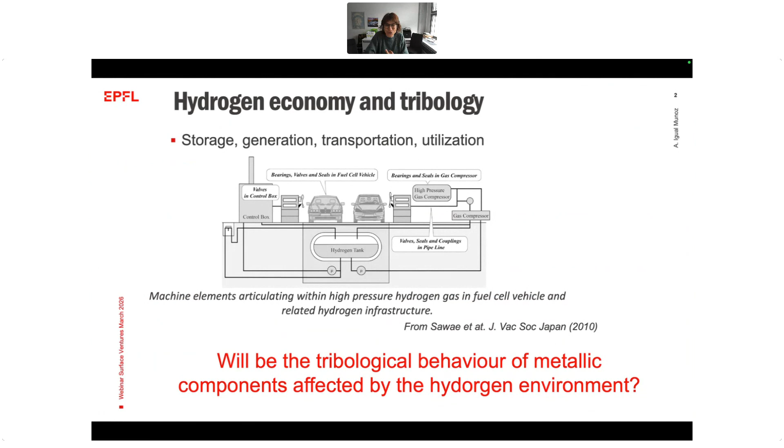Nowadays it's quite popular: hydrogen is expected to be the clean and renewable energy carrier for the future environmentally friendly society. Of course, we have all the machine components or installations that are not used to this hydrogen atmosphere, so how are they going to be behaving, what will their tribological behavior be, how will friction and wear be affected in bearings, in seals, and in all the infrastructure for transportation and generation of hydrogen. This is somehow the motivation of this work that I'm going to present: the tribological behavior of these metallic components that are not used to living together with hydrogen, how they will be affected by this hydrogen environment.

What has been largely studied are the different interactions between these material surfaces and hydrogen. For example, there are quite a lot of references dealing with the mechanism of physisorption of hydrogen molecules, followed by chemisorption of the dissociated hydrogen atoms on metal surfaces, and the possibility of forming metal hydrides. Those are just examples. Also the mechanism of diffusion, where hydrogen is trapped within the materials, and their interactions with the metallurgical structure of those materials.

Then again, I come back to the questions that we want to address: how this tribological contact will influence the interactions, and what will be the response of the materials to these interactions.

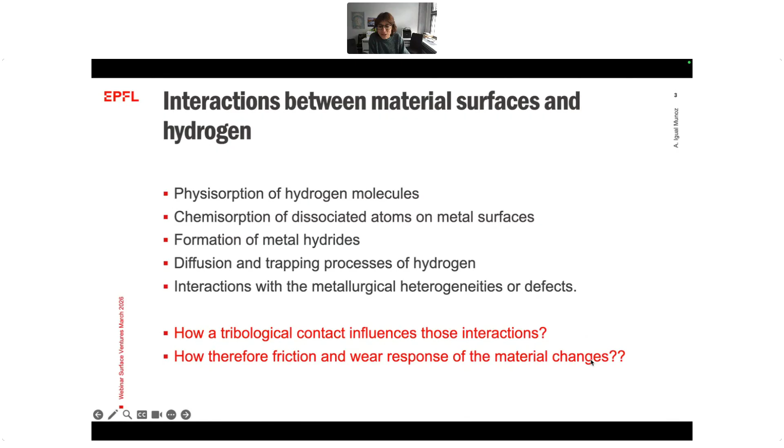At this moment, I checked a little bit before starting what were the main observations of people dealing with tribological contacts within hydrogen atmospheres. I was a little bit surprised because they were a little bit contradictory. In some cases there were observations in which hydrogen had no influence or slightly increased friction. In other cases, hydrogen was capable of increasing or lowering wear, depending on the microstructure and on the charging conditions. People have also tried to determine and quantify the critical amount of hydrogen needed to start really damaging the material.

Recently our colleagues from Luleå were working with rolling sliding contacts using a similar approach to ours. They observed that surface damage follows the concentration of hydrogen diffusing in the material. So the classical hypothesis of dislocation blocking effect of hydrogen cannot explain all the observations.

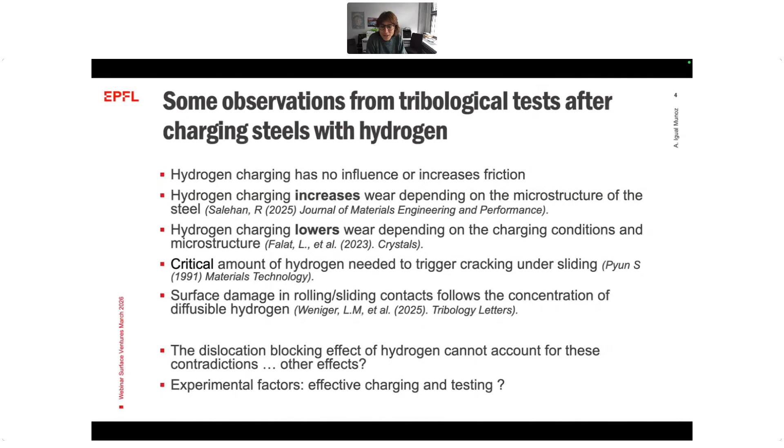Our question is, are experimental factors also playing a role? Because this relates to how we are measuring. So before starting testing, we asked ourselves several questions. First, how do we introduce hydrogen into the material in a well-controlled manner? We can use gaseous or aqueous conditions, and how long it will remain in the material after charging and during the tribological test.

One thing is how to introduce hydrogen into the material in a well-controlled manner, but then we also need to quantify how much has been taken up by the material. And then, of course, how can we discriminate the multifactorial effects in a tribological contact? How can we distinguish the effect of hydrogen from other material or surface effects?

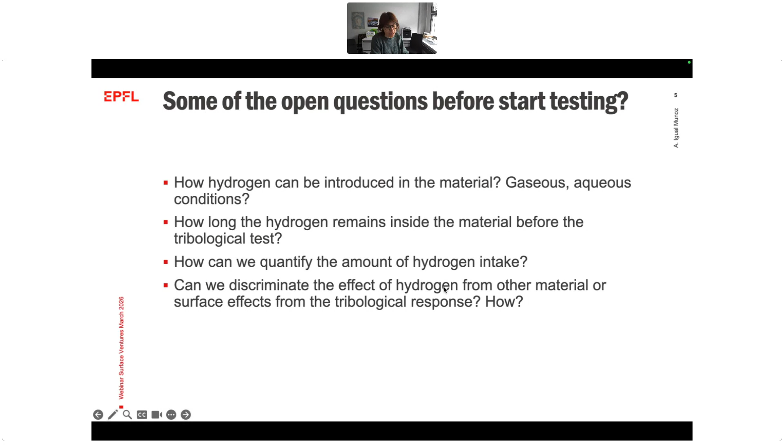So which is the goal of our work, the goal of this presentation? It is to assess the influence of these experimental conditions when we try to understand the effect of hydrogen-metal interactions.

Our strategy: coming from an electrochemical background, we use a simple electrochemical setup to charge the material in a well-controlled manner. Then we try to determine if the effect on the material is real, so we measure changes in fracture energy and hardness, and then we carry out tribological tests under well-controlled surface conditions.

To do that, we do dry sliding, but we also use the triboelectrochemical setup to impose certain surface conditions: passive conditions to mimic typical corrosion conditions, for example for steel, and cathodic conditions to keep the hydrogen inside the material and avoid it escaping during the tribological testing.

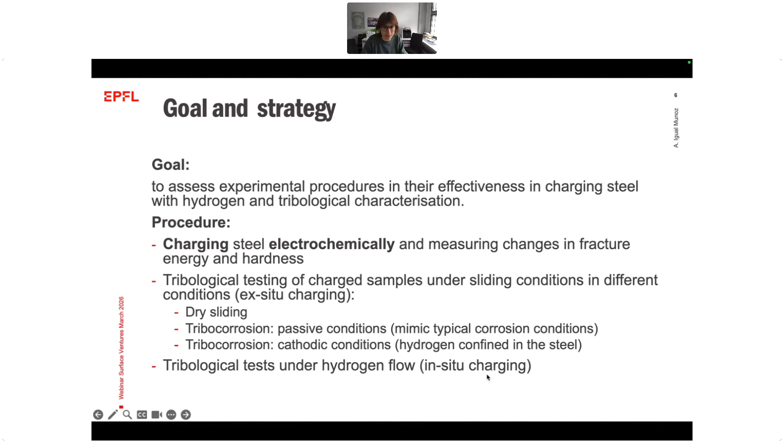One thing is this ex situ charging, but then we went one step further and tried to do the same with in situ charging, which I will explain later, done in collaboration with ERTEC.

Just before starting, a few words about the mechanism through which electrochemical charging of hydrogen into metals takes place. It happens through reduction of a water molecule in neutral or basic medium, or through proton reduction in an acidic medium. By cathodic polarization, we force the reduction of the proton into hydrogen.

This hydrogen is first adsorbed onto the surface. Then this adsorbed hydrogen has two options: either entering into the metal, or meeting another adsorbed atom on the surface and forming a hydrogen bubble. What this adsorbed hydrogen will do depends on several factors: surface factors, electrolyte, and polarization conditions.

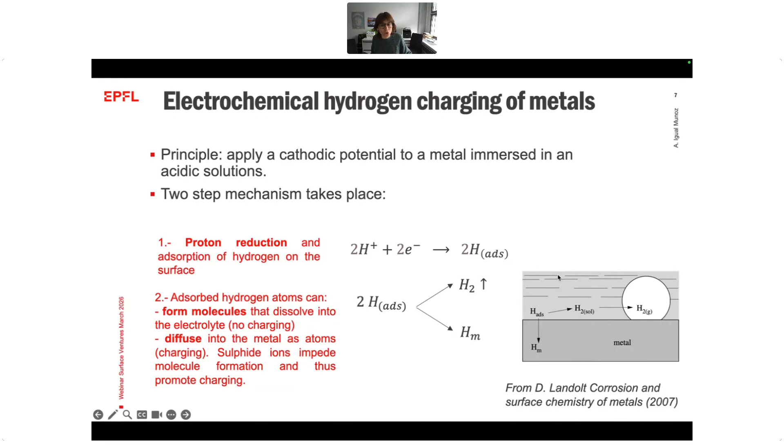What we did is a very simple charging. We used a sodium sulfide solution, because species like sulfides inhibit the recombination of hydrogen. With this solution, we favor hydrogen intake into the material.

We apply a certain current between an inert anode, typically a dimensionally stable anode, which is titanium covered with some coatings, and the cathode, which is the material we want to charge with hydrogen—in this case steel. We apply a certain current for 24 hours.

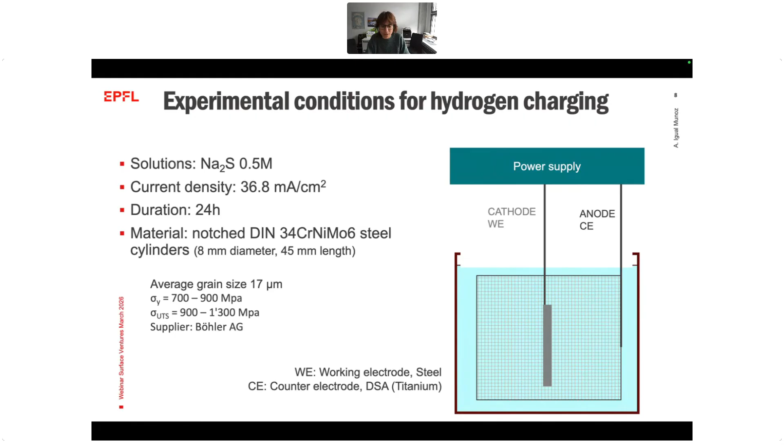In the first case, we charged a Charpy sample to identify the consequences of charging on the properties of the material. The first question, as I was saying, has hydrogen penetrated the steel? If we look at hardness, it didn't change at all before and after charging. However, the amount of absorbed energy of this steel during fracture decreased around 50% after 24 hours of charging.

Even more, this effect of hydrogen remained the same over several hours. We can see the fracture energy after charging for 24 hours and leaving it in open air for 3 hours—the decrease in fracture energy didn't change during this period. That was good news, because it gives us a little time to carry out the tribological test while the effect of hydrogen is still there.

On the other hand, the difference between the charging effect when we charge 24 hours or 48 hours was not really anything—it was exactly the same.

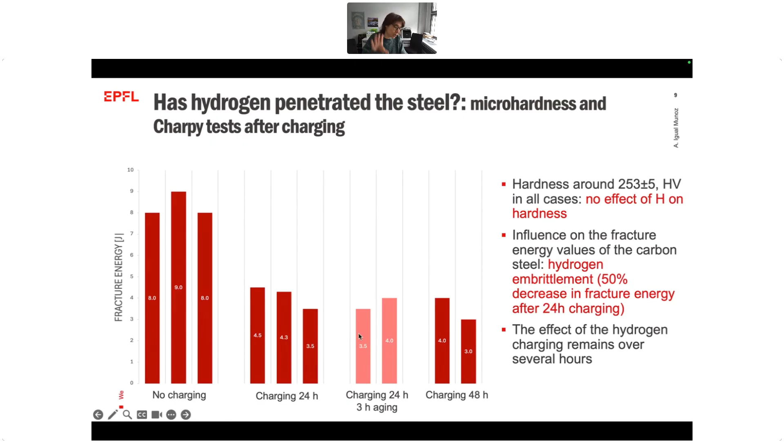So with this test, we already know we have the hydrogen intake, so we can define some tribological testing conditions. We did it in a tailor-made tribometer, a homemade ball-on-disc tribometer, under different environmental conditions.

So we repeat the same exercise, charging the steel for 24 hours. We are going to rub against an alumina ball, 6 millimeter diameter, to impose a certain contact pressure with a sliding velocity of 20 millimeters per second, stroke length 4 millimeters, for a certain number of cycles.

And then what we change are the surface conditions. We did tests dry, but we also did tribocorrosion tests under well-imposed potential electrochemical conditions, meaning cathodic potential. This implies that the hydrogen remains within the material. Then, in presence of surface film, we do that by applying an anodic or passive potential.

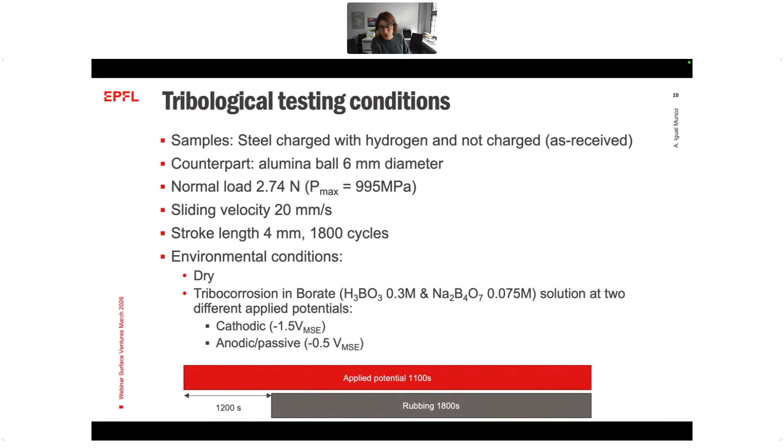So this is the experimental sequence we did, and this is the experimental setup. Basically, we have a linear motor that moves back and forth and transmits a weight that transmits the load into the sample. We measure the normal load and the frictional load through a 3-axial force transducer.

All of this is inside an electrochemical setup with a reference electrode that allows us to impose this surface condition, the potential, and a counter electrode that allows for measuring the current, which is directly proportional to the reaction rate. Then we impose these conditions and we rub, as I said, through this moving arm up and down.

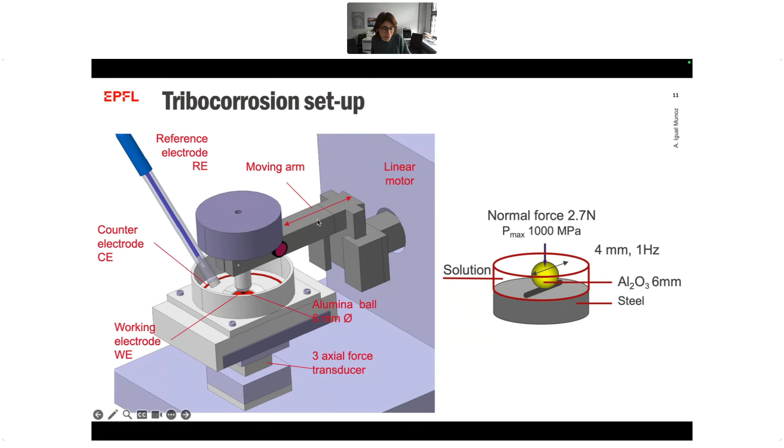What are the results? What do we measure? First of all, under cathodic potentials, as I said, here the hydrogen remains inside.

So at the beginning, when we impose the electrochemical conditions, we just measure the current in the sample, it's negative, because we are again reducing the water.

And when we start rubbing, the current went down a little bit. This small variation in the current can be attributed to the increase in the mass transport of oxygen towards the surface, also because of the pin motion, also because of the roughening of the surface. But we have this decrease.

In the non-charged sample, we see slightly different behavior of the current, of course, because we are somehow reducing the water on the surface, and we didn't observe any major difference in the coefficient of friction.

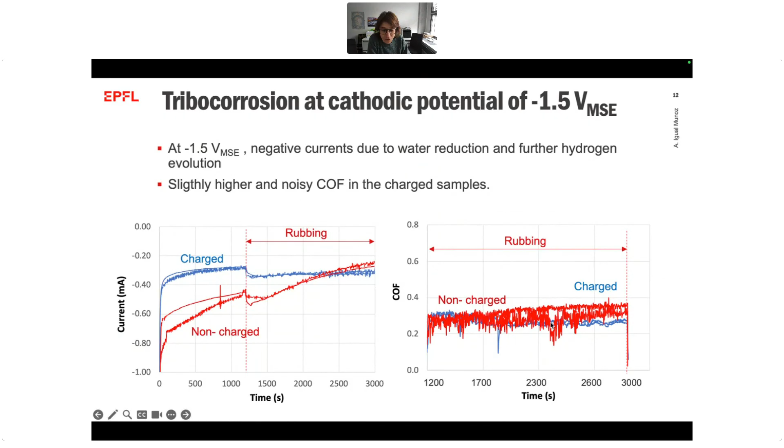Then we go to see what happens on the surface, and this is the optical image of the non-charged and charged samples. We see in the non-charged sample this kind of nice plastic deformation with smearing and a uniform wear track. The width of the wear track is more or less the same, but in the charged sample, it seems that we are blocking the plastic deformation, generating more disrupted surfaces.

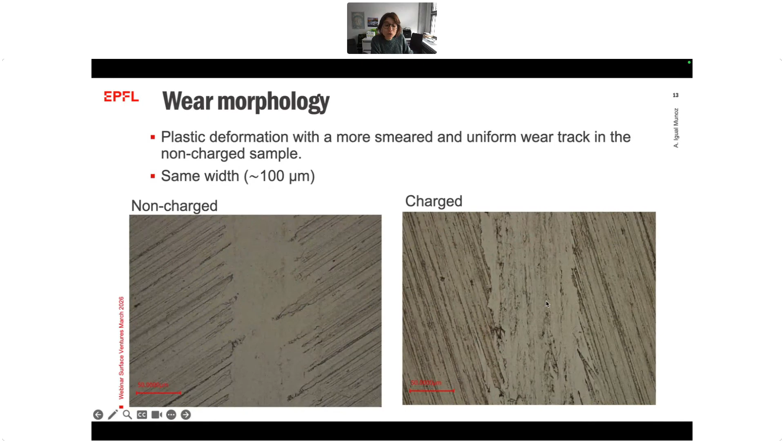So we already see differences. We went a little bit further in the analysis. Now we cut a cross section, perpendicular to the sliding direction. So this is the wear track. We do a FIB cross section, and then we can see not only the surface but also the subsurface, what happened inside the material.

And what we observe is this kind of formation of blisters in the non-charged sample, with even local delamination of this very smeared material.

And in the charged sample, the hydrogen uptake somehow blocks the deformation, and then what it generates is more accumulation of strain, so a little bit of embrittlement of the material, and grain refinement—slightly higher grain refinement compared to the non-charged sample.

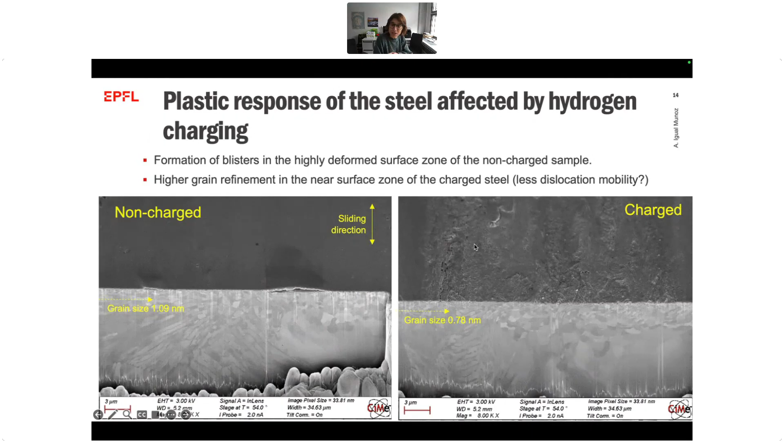So we see differences even if we have the same shear. Then we go to the other situation.

Now we apply a passive film. So we form, in a well-controlled way, a surface film on top of it. And here the protocol is always the same: we impose the electrochemical conditions and we register the current.

So we already see, from the non-charged red curve with respect to the blue, a difference from the beginning. The non-charged sample shows a very low current at the beginning. Of course, at the onset of rubbing, the current increases because we are mechanically detaching this oxide layer and accelerating the corrosion of the underlying metal.

So current increases. In the charged sample, in this case, when imposing the electrochemical conditions, we have an abrupt, huge increase in current, and then an exponential recovery. This typically means we are oxidizing something. What we are oxidizing, we will see in a moment.

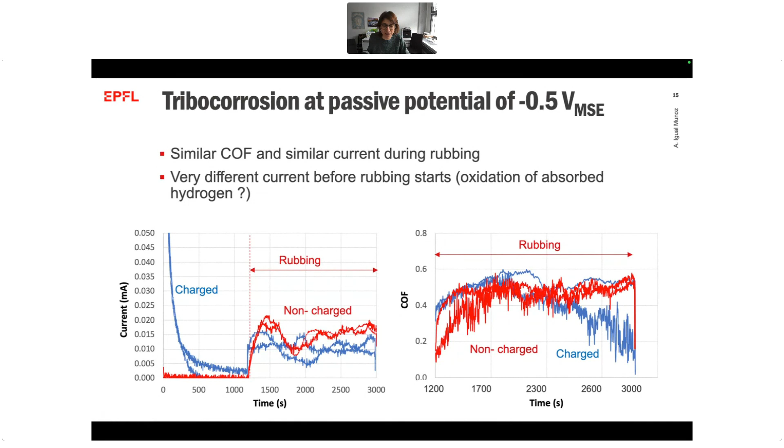The coefficient of friction, more or less, is very similar in both cases. We do the same and have a look at the surfaces. In both cases they are also very similar: the wear morphology, plastic deformation, presence of third body, and the same width of the wear track.

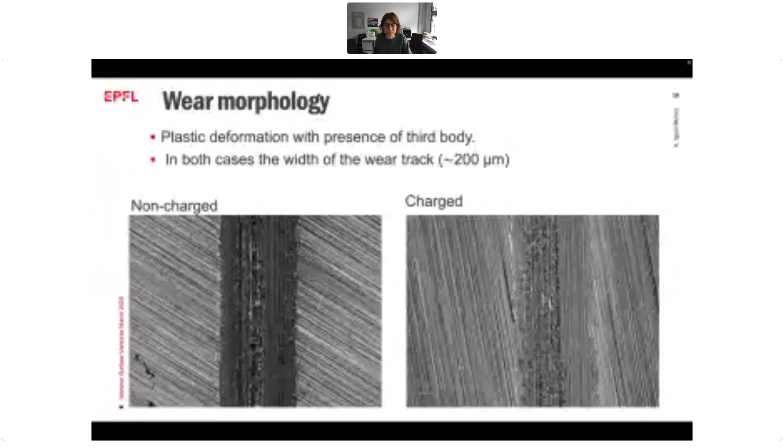If we again do the cross section, this is the sliding direction. Here also at the subsurface level, we see more or less the same features. We see this third body, we see this smear material, we see cracks — subsurface cracks, surface cracks. So basically we see more or less the same effect, same grain sizes.

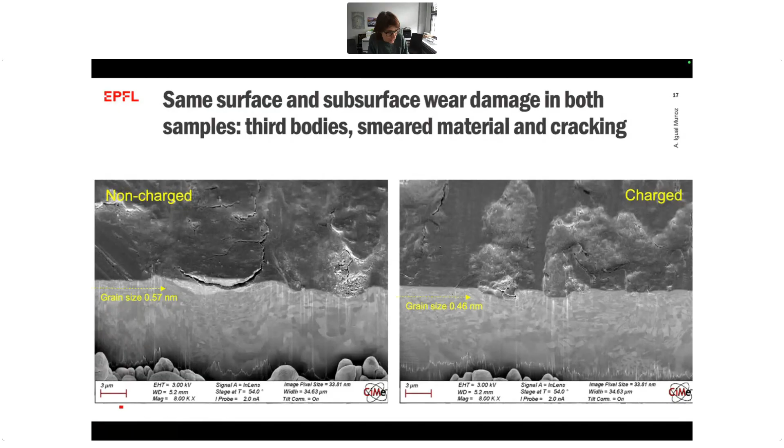So what has happened? Our question is: are we sure we have inside the hydrogen we have taken during the charging? To verify that, we did an extra test.

Imposing, when passivating the steel, we have to apply an anodic potential, a certain potential, and what happens is we register the current at this potential. Here there is no rubbing. In the non-charged and the charged sample, we see a difference in current, meaning a difference in charge during this period. What happens is all the hydrogen we have at the surface and inside the material, because of the oxidizing conditions, is being oxidized and is leaving the metal.

So at the end, the response of the material charged and dissolved in hydrogen is the same as the one that is only passive. So the difference in current corresponds to the oxidized hydrogen between the non-charged and charged samples. And then we can easily calculate the amount of hydrogen that corresponds, assuming a certain diffusion coefficient, to the maximum amount of hydrogen we can put inside the material.

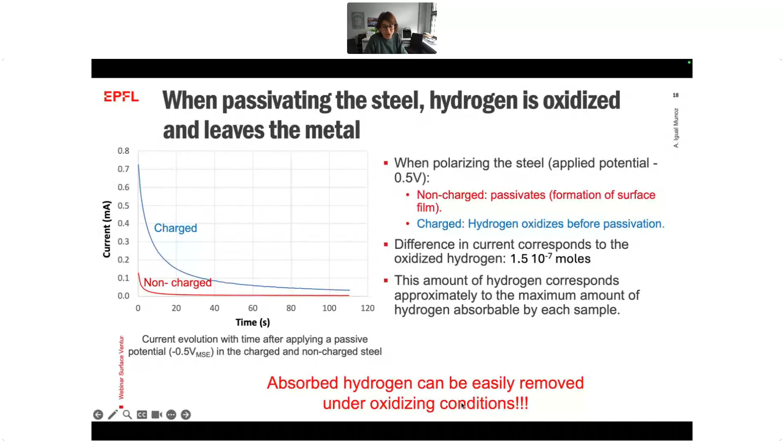So the absorbed hydrogen can be easily removed under oxidizing conditions. That means the embrittlement we observed during passive conditions was not due to the effect of the hydrogen, but mainly to the fact that you have a surface film, a passive film, on top of that. This is already known in tribocorrosion — it's called the Roscoe effect.

So the main effect of this passive film is that it generates and blocks the dislocations. So we start accumulating a lot of strain. We cannot eliminate the dislocations because we have this passive film, so the effect is an embrittlement effect. Whenever we don't have surface films, the dislocations can be annihilated at the surface, and the strain accumulation is a little bit limited. So this is the explanation why we have the same response in the case of charged and non-charged samples.

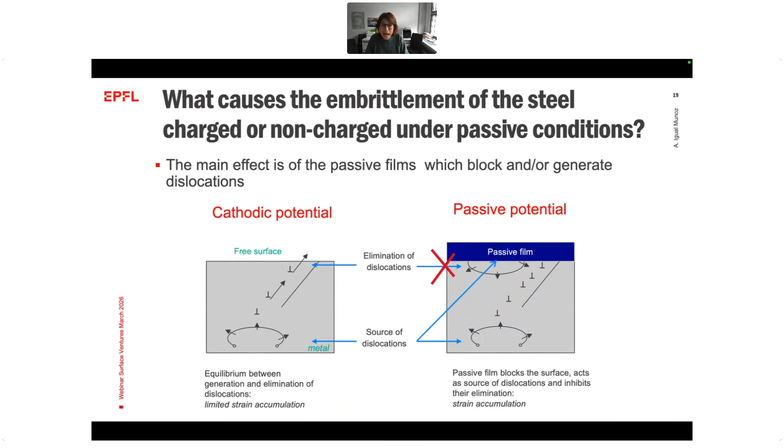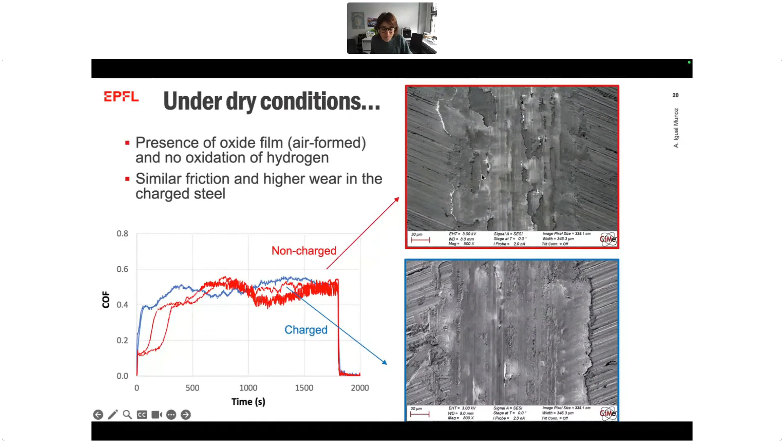On the subsurface, the differences are even more clear. In both cases the mechanisms are more or less the same. We have the third body here in the non-charged, and we have the third body in the charged. We also have the subsurface deformation, the tribologically transformed part of the subsurface — here it's a little bit thicker.

But in the charged sample we have a thicker third body, a cracked surface, and a higher degree of recrystallization. The grain sizes are slightly smaller, so there are differences. In this case we are not removing the hydrogen by electrochemical imposition of oxidizing conditions, so it's still there. What happens when we charge and load mechanically is another question.

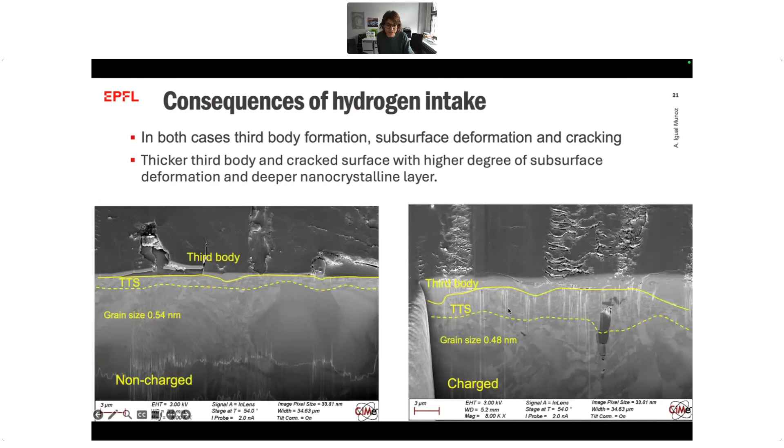As a summary, we have quantified the grain size of the material as a function of depth, how deep we measure this grain size, with 0 being the surface. We see that the main differences occur under cathodic conditions, whenever we keep the hydrogen inside the material. So the charged sample, whenever we have this hydrogen, shows decreased grain size over all the studied subsurface depth.

In the case of passive, charged or not charged, there is no difference. And in dry conditions, we still see, at the very surface, a small difference.

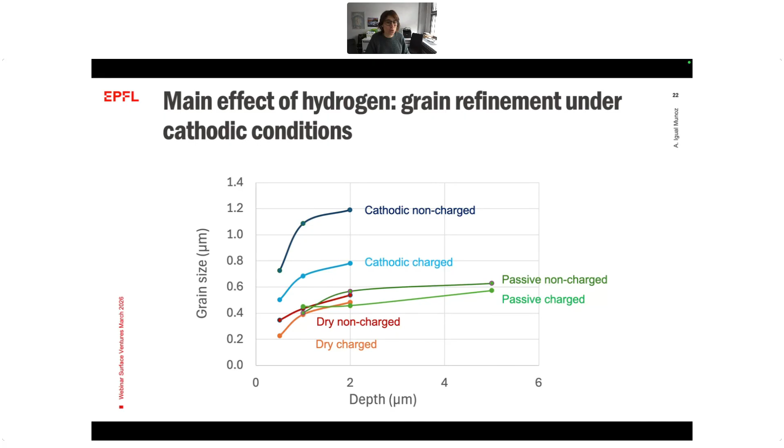Finally, these observations demonstrate that the hydrogen effect is strongly dependent on the electrochemical conditions, in the presence or absence of surface films, even though we may have the same wear mechanism.

When we don't have these surface films, working under cathodic conditions, hydrogen is confined in the material, and we see a difference in the plastic response of the steel. Under passive conditions, we don't see it; other effects play a role. Under dry conditions, there's a combination of surface films and the presence of hydrogen. All these effects can still be explained by this dislocation blocking effect of hydrogen, but we must take care about the presence of these surface films.

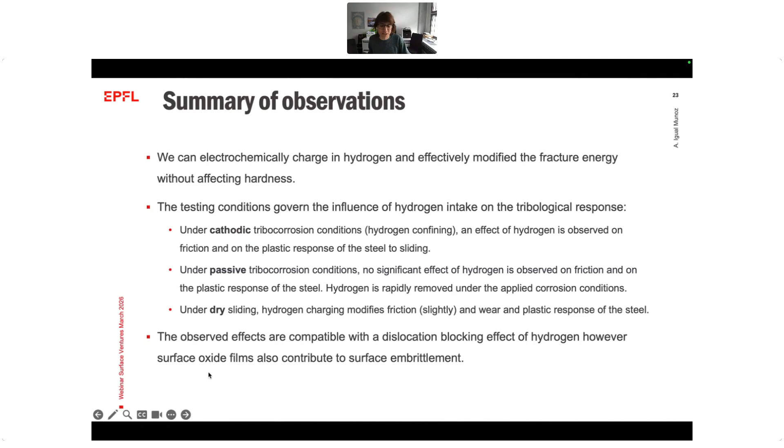So now we do the second iteration, the reflection from this work. We say, whenever we design an experiment to assess the influence of hydrogen atmosphere in my material, in my machine component, we have to ensure effective charging. We have to ensure that hydrogen is not lost during the experiment, and we have to be sure which other factors that cause embrittlement are considered.

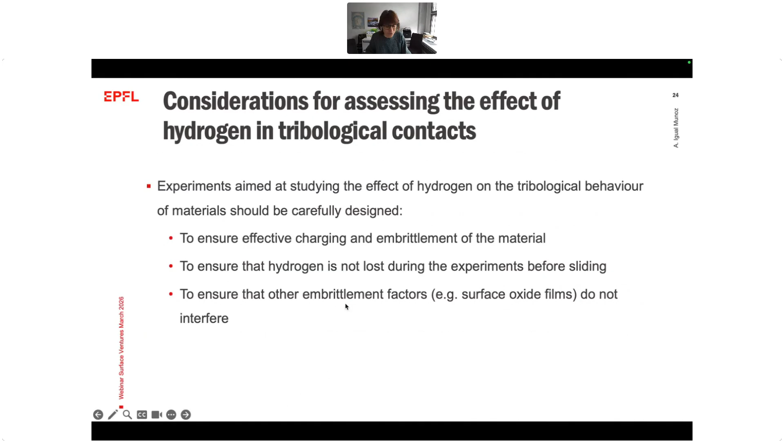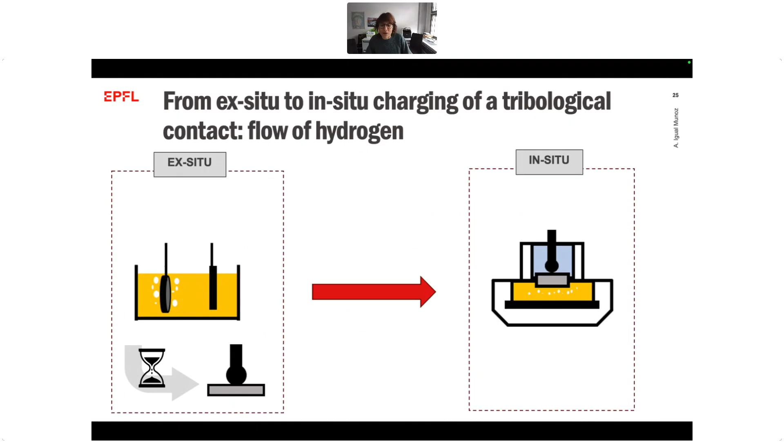So for that, we went from an ex situ experiment, where we charge and then do the tribological test, to an in situ conception of the testing conditions. We developed, together with ERTEC, an electrochemical permeation cell, based on the classical permeation technique introduced by Devanathan and Stachurski.

This is known in electrochemistry, where we have a thin membrane, in this case our steel sample of 3.5 millimeters in diameter, and we charge under the same conditions we observed in the previous example. We charge the steel in the entry chamber, and it diffuses through the sample, where on the exit chamber it can be quantified or oxidized. In the generation chamber, we reduce the proton; in the exit chamber, we oxidize the hydrogen, so we quantify the hydrogen flow.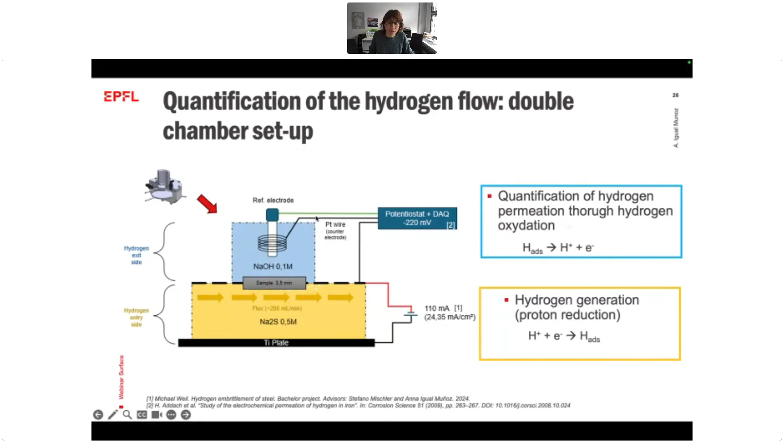So this is typically an example of how we quantify this flow. We impose certain conditions in the exit chamber and register the current. At the beginning we passivate, and then we start charging the bottom part. Just from the current, and using Fick's law, we can extract directly the diffusion coefficient of hydrogen in my specific steel. This current is directly proportional to the hydrogen flow I'm going to have in my system.

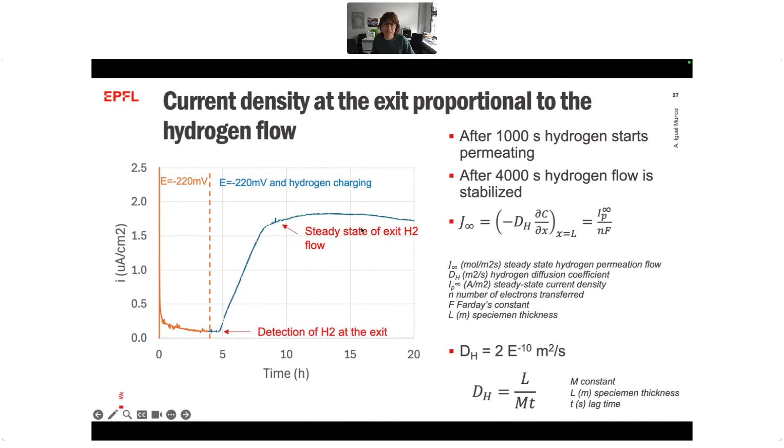This system can be a little bit more elaborated to determine exactly how much hydrogen is trapped in the steel, because then we do just a mass balance. I know the amount of energy, the amount of current I use to reduce the proton. This proton will partly enter the steel, and part will be recombined, forming hydrogen. If I have a hydrogen sensor in the solution, and I know the amount of hydrogen that has been recombined, I can determine how much has gone through. In the exit part, I determine this diffused hydrogen. The difference is what remains in the steel. This is another way to determine the amount of trapped hydrogen in the steel.

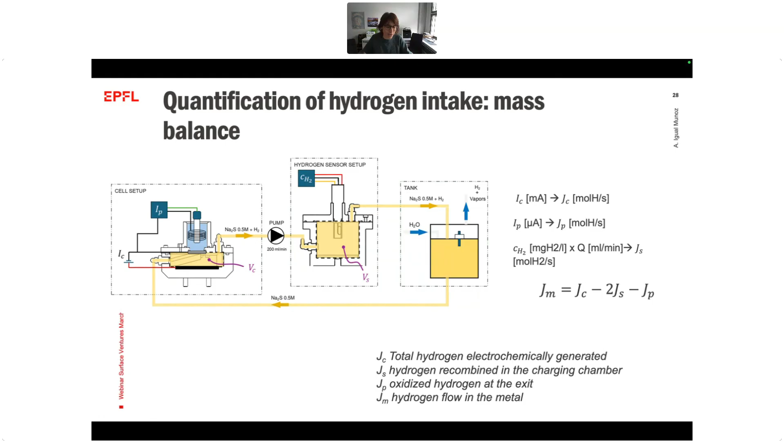So this is with respect to the generation of the hydrogen flow, and then the quantification of this flow.

But then we can take the permeation cell and place it inside a tribometer, and this is what we did with Rtec. We can put our permeation cell here, and look at the current, which is proportional to the hydrogen load. We apply the load, and because of the stress distribution within the material, we change the flow rate of hydrogen through the steel. This is just with static loading, without sliding. The static loading, the generation of this stress field, influences the flow of hydrogen at the exit.

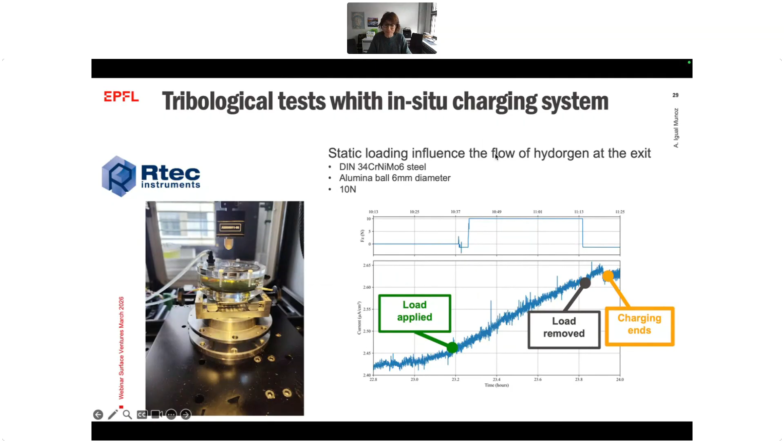And now we slide. We can slide against an alumina ball, under the same conditions as the ex-situ experiments, the same sliding velocity, the same normal force. What we see, comparing the coefficient of friction, is that we start seeing some differences between the tribological response in the ex-situ cell compared to the coefficient of friction in the in-situ cell. This is under dry conditions.

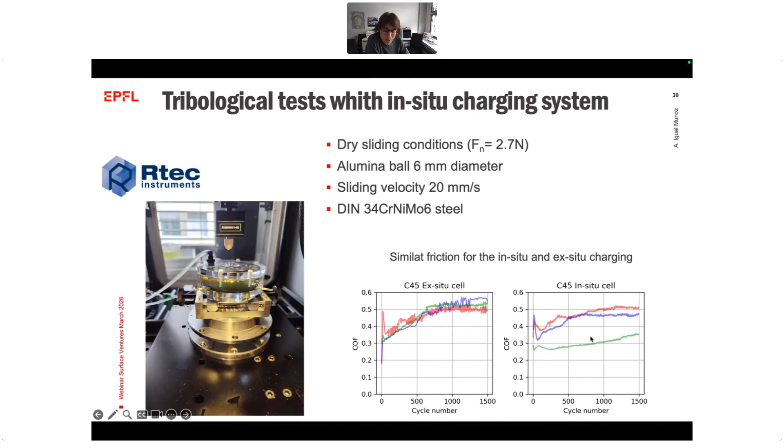Have certain scattered and slightly different coefficient of friction. What we observe when we look at the surface is the non-charged wear track, the wear track of the charged sample ex situ, and the wear track of the charge in situ. We see different wear depending on these charging conditions. In this case, we have thicker and higher cracked surface in the charging condition.

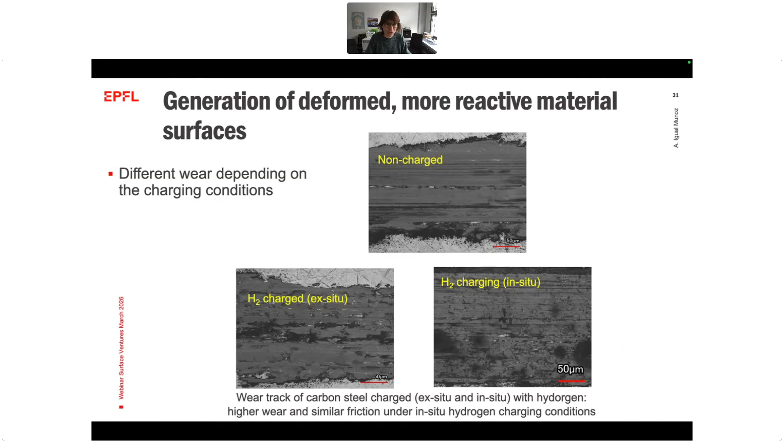This is an ongoing work, of course. We are now trying to understand this interaction, hydrogen and material, but still developing the smarter way of carrying out this test to answer the question of the interaction hydrogen-metal under tribological conditions.

So with all of this, I would like to conclude this webinar by saying that if we want to understand the interaction of materials and hydrogen under tribological conditions, we have to think very carefully how we want to carry out the experiments, and take care of the already developed concepts in tribology and then in tribocorrosion, because here we are in a reactive environment. Hydrogen is a reactive environment, so we have to think twice, and for that we have concepts. There are different things.

One thing is that we operate on the continuous flow of hydrogen - this is the in situ measurements. Another thing is that we just charge and then we test. The questions to be answered will be different, and this will also depend on how we test the operating conditions of the machine component we are addressing.

So in any case, the hydrogen flow effect can be assessed with these tailored experiments and specific permeation cell coupled to a tribometer. And then, of course, we can start answering the real questions about the effect of stress-induced deformation on hydrogen intake and uptake. This again requires being aware that during testing we generate, depending on the testing condition, a certain surface with certain properties that can modify the outcome of the hydrogen-metal interactions.

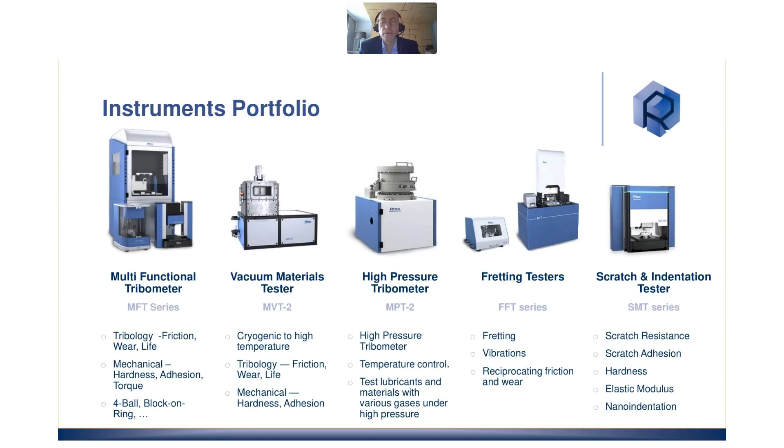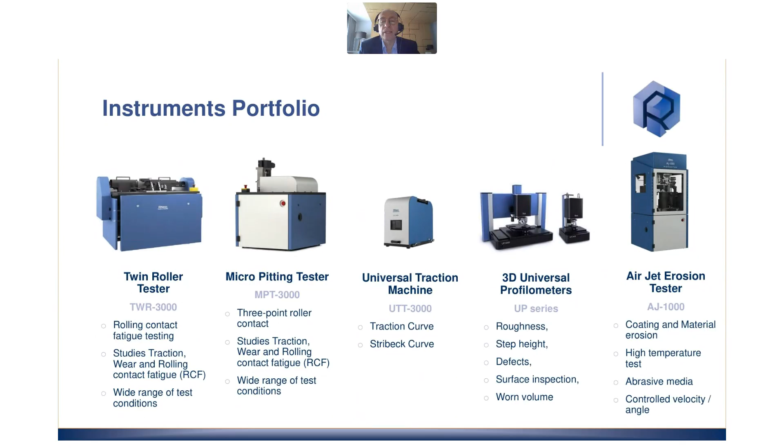There is a presentation I don't have here, because Rtec Instruments has been involved quite a lot in micro-mechanical testing with scratch and indentation at room temperature. There has been a strategic partnership and new information about the collaboration between Rtec Instruments and Micro Materials. There's a new press release from last Monday that I invite everyone to look for, about the extension of measurement capability for nano and micro indentation at high temperature, which gives more insight into the range of application for mechanical characterization.

To continue with today's application, in recent years there has been a lot of requests about electrified tribology, being able for a fluid or grease to characterize the combination of lubricant characterization with electrification. This has been requested quite a lot for tribology testing, whether with a 4-ball test, linear oscillation, mini traction, fretting test, or high frequency oscillation. There has been quite a large demand for electrification.

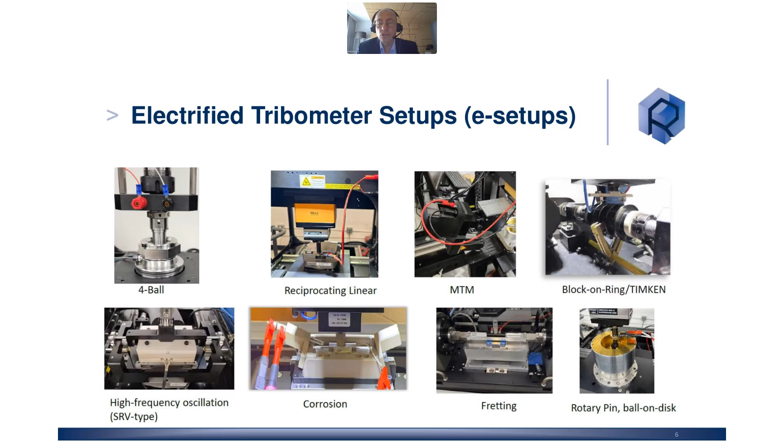The interest behind that is there's a lot of need in the industry for testing in tribology with electrification. This comes from electric vehicles and hybrid vehicles, where you want to test a gearbox or e-motor, where there might be stray current remaining that influences the wear resistance capability of different materials. The combination of lubricant with material in presence of stray current might influence the wear resistance of the material.

Therefore, having options like electrical contact resistance combined with the possibility of tribology testing with load and speed gives good insight for laboratory testing in different conditions. This could be electrical contact resistance measurements, or a potentiostat applied with DC and AC current, but there are a lot of different applications and conditions related to that.

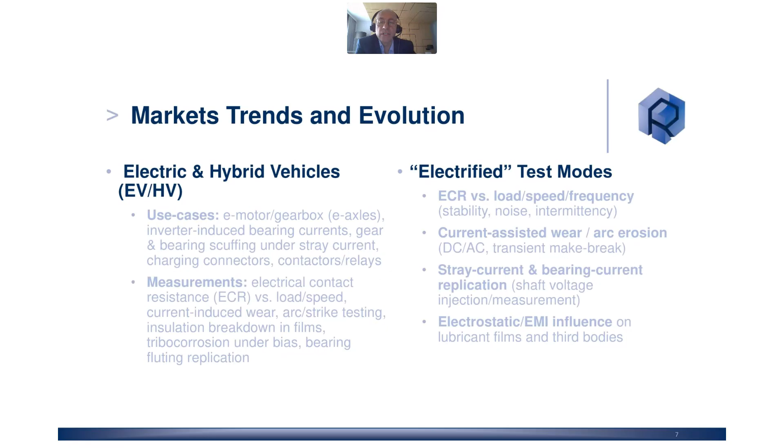The collaboration done with EPFL has the advantage of being able to propose hydrogen cells that I will show you later. The big advantage is that it has also been possible to develop a tribocorrosion cell of a new generation based on these hydrogen cells, which gave a better understanding of the best conditions of testing for that.

The tribocorrosion cell, if you're not familiar, has the possibility with a 3-electrode system to have the sample as a working electrode, then a reference electrode and a counter electrode, generally platinum, in order to have a 3-electrode system being able to apply a potential and then measure the current.

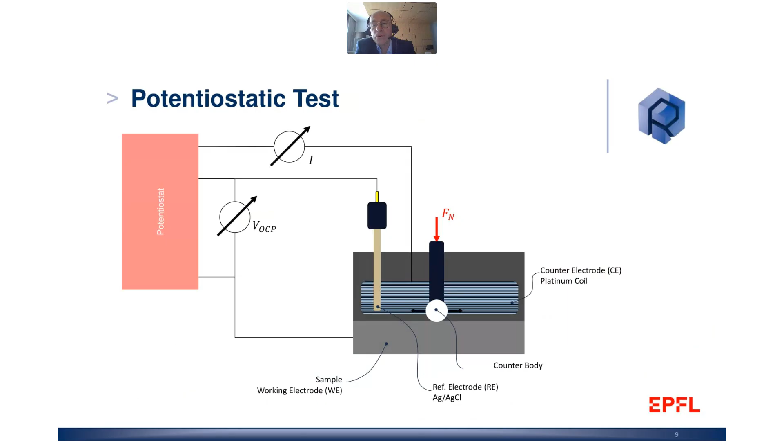That represents a very nice application where you could simply apply a potential. You can initially measure the open circuit potential, seeing the current under open circuit potential condition. But by applying a potential, you can create passivation or depassivation of the material and simply see the evolution of the current before starting a tribological test.

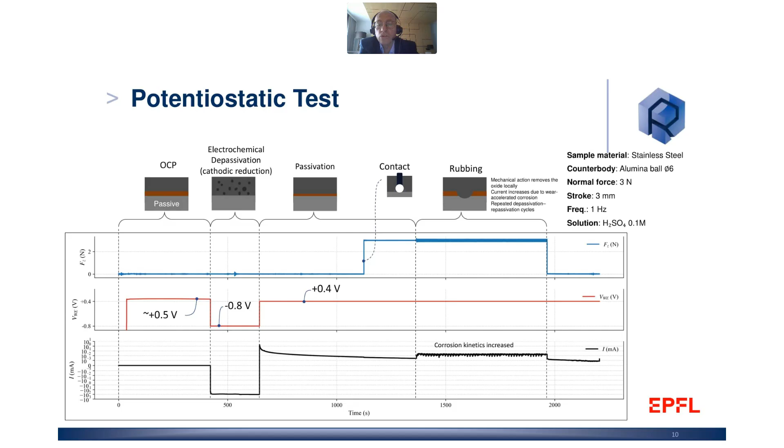After you start a tribological test, you are able to measure the corrosion kinetics, getting useful information on wear and coefficient of friction of the material under applied potential, as well as measuring a current of the corrosion kinetics with this kind of setup. That's a setup possible on a linear tribometer and a nice add-on for different tribocorrosion studies for materials. But what is even more of an advantage is this combination for hydrogen tribology.

There have been a lot of requests for testing in the recent years. For many years, people have been interested in doing tribology under hydrogen environment and hydrogen conditions, and there have been a lot of requests for high pressure tribometers. But high pressure requires a certain condition of testing with a specific chamber. The interest for hydrogen tribology has gone up to high pressures of 100 bar.

Of course, high pressure hydrogen requires very strict conditions of safety and regulation, meaning that for a lot of cases, the budget of the equipment is much lower than the budget required to build a specific laboratory. So the hydrogen tribometer is equipment that would not be possible in all kinds of laboratories, because it requires a specific laboratory to be able to accept it. The idea behind the development at EPFL is really to have the possibility of doing testing with hydrogen charging of material.

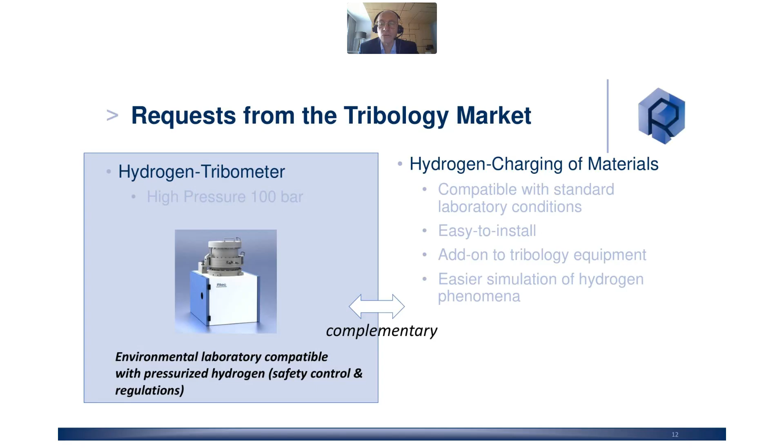Of course, these two ideas are complementary. It does not mean we'll replace the whole hydrogen tribometer, but it has a big advantage to be able to do testing under hydrogen in a standard laboratory without strong safety regulation.

For those of you not familiar with electrochemistry, the idea is relatively simple: if you apply a potential under a liquid environment, you are able to generate hydrogen. This simple idea in electrochemistry was taken as an advantage in the EPFL setup, in order to generate hydrogen simply by applying a potential in a specific liquid solution, and be able to simulate hydrogen embrittlement in steel material as an example.

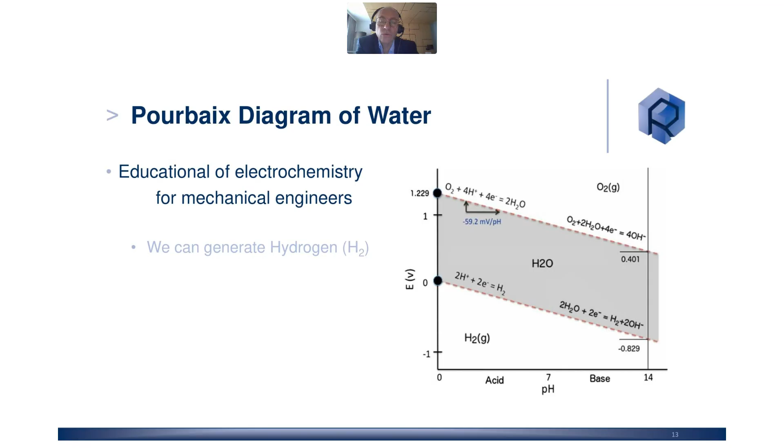Of course, there are many technical details on this hydrogen testing, but in reality it is a relatively easy add-on to an existing linear tribometer in order to do study under hydrogen embrittlement, hydrogen environment.

The idea behind this kind of hydrogen study is that you still have the application where you can charge the material under hydrogen at high pressure, then try to do in situ measurements under high pressure. But here the idea is really to have a setup of electrochemical charging and be able at the same time, or just after, to do tribological tests. This cell is relatively small in size and has the advantage of being able to be installed on a standard tribometer to do already advanced studies.

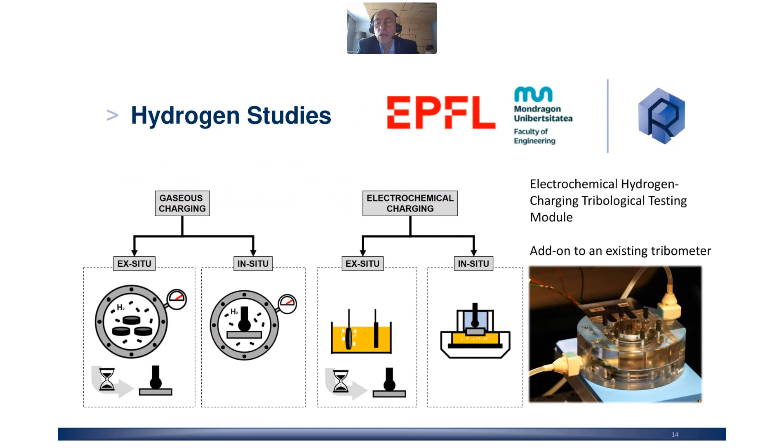So I'll show you a bit the application of hydrogen on an existing tribometer. I did not give you all the detail in reality, but we would be happy, with EPFL and Rtec Instruments, to give you more technical detail about this setup if you are interested in this range of application.